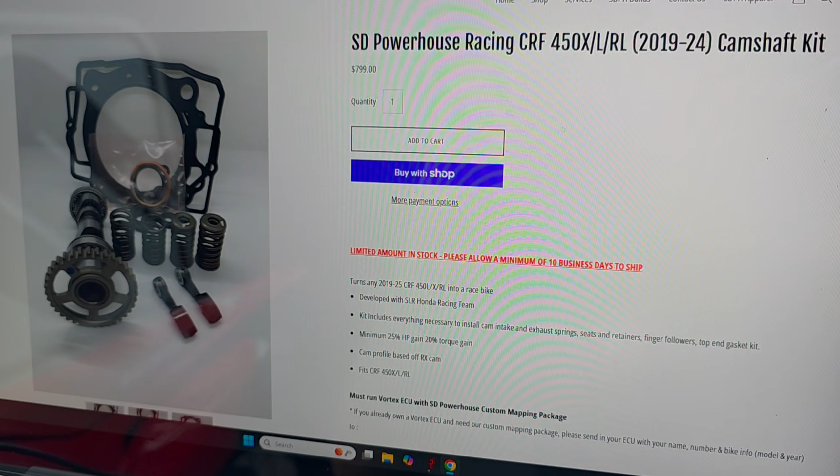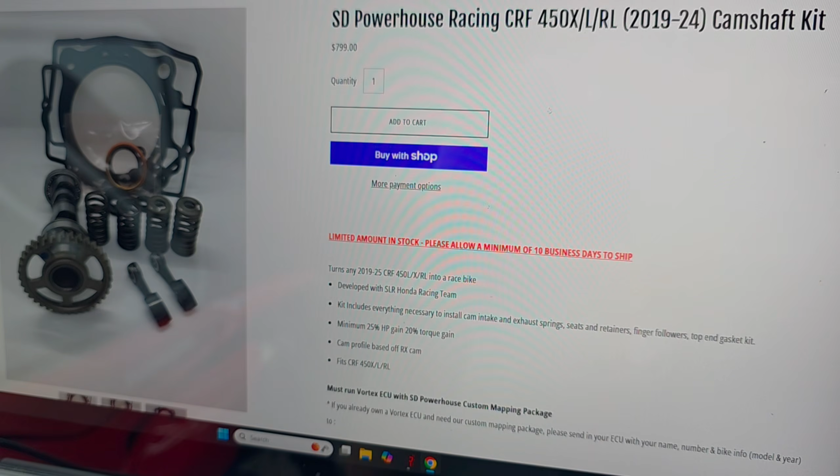The only caveat with their kit is that on their website it specifies you have to run a Vortex ECU with their tuning in place, and that is obviously now not the case. The entire reason we did this was to build mapping for the OEM ECUs for the CRF450Ls and RLs with this kit installed. They also note on their website that you will get at least 25% more horsepower and 20% more torque. We're actually way beyond that when you compare these bikes in 100% bone stock trim to the way it sits behind me now.

So without further ado, let's dive right into this by starting off with where this thing rolled out of the showroom floor in terms of power and torque compared to where it sits now.

Let's start this comparison off here with these three graphs. The green line is this bike in 100% bone stock trim once we're done breaking it in on the dyno. It made 37.75 horsepower and 27.37 pound-feet of torque to the tire on pump gas. With no physical changes made to the bike whatsoever, you get the red lines, just with our custom tuning in place for the still 100% stock bike. Power comes up to about 39.86, just under 40 ponies, and 28.25 pound-feet of torque, again to the tire on just regular pump gas.

Then the blue line is a good example of what these bikes are capable of with some simple bolt-on modifications and our custom ECU mapping to match that specific setup. For this example, the blue lines are the full Yoshimura exhaust, one of the twin air filter kits, or just removing the backfire screen from your stock filter and pulling that airbox lid off. Power is about 44 horses to the tire and 31.1 pound-feet of torque, again still just on standard premium pump gas. So peak output of 44 and 31 for horsepower and torque are the numbers to beat.

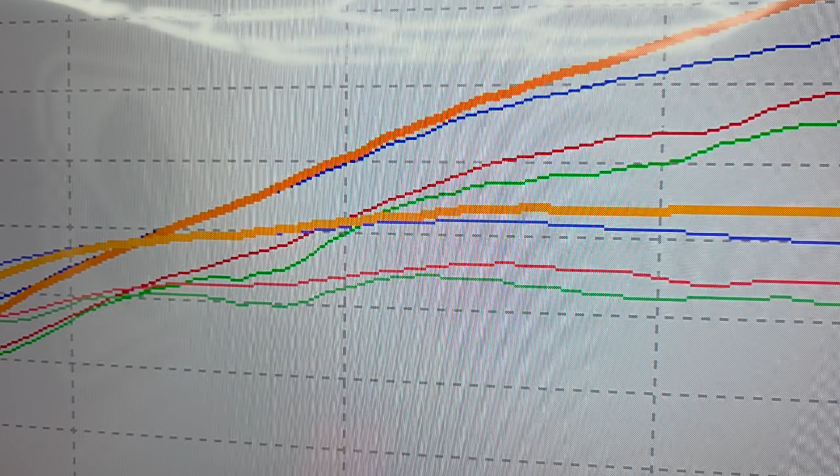And here's what happened when we installed that San Diego Powerhouse cam kit and developed our custom tuning for the new airflow characteristics of that kit with this specific intake and exhaust setup. Peak power is now 49.9 horses, effectively 50 horsepower, and 32.25 pound-feet of torque. The orange lines are exactly as the bike sits behind me right now, and there are enormous gains everywhere after 6,000 RPM compared to the stock cam while still having that Yoshimura exhaust and twin air kit installed. That orange line for both power and torque carries away everywhere above 6,000 RPM.

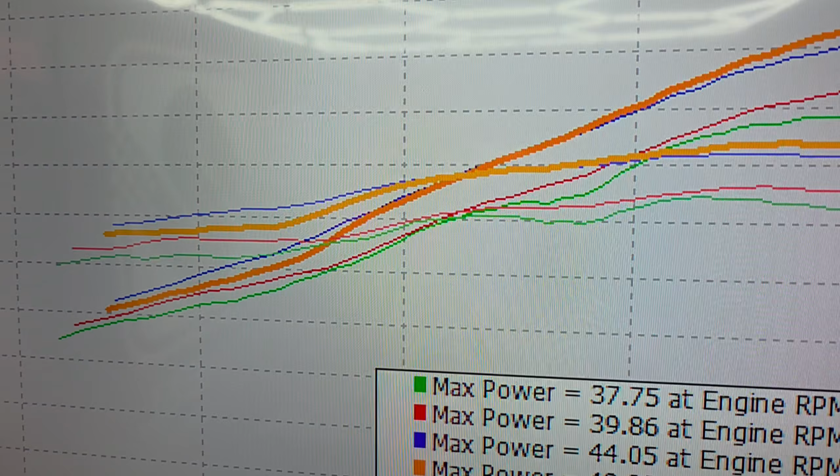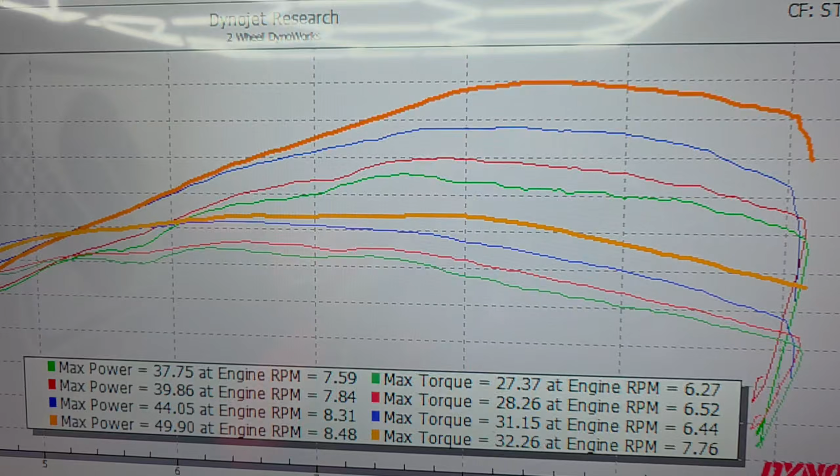Now, with cams, you don't get everything for nothing. You always lose somewhere, and this does actually flow a little bit less air below about 5,000 RPM. You can see that in the power and torque curves, where those orange lines are obviously just lower than the blue ones. But honestly, I could not care less, because the top-end performance improvements are absolutely insane, and the peak number improvements absolutely do not tell the whole story.

I'm actually going to go ahead and clean that graph up just a little bit here and remove a run or so, just to make this a little bit easier to read so I can show you guys exactly what I'm talking about.

So what we've got here right now for comparison is the bike in 100% stock trim - stock intake, stock exhaust, stock tuning, stock everything. That's the green lines. Blue is with just the bolt-on modifications and our tuning for them - the full Yosh, either the twin air kit or just yanking the backfire screen off and yanking the airbox lid off with our tuning.

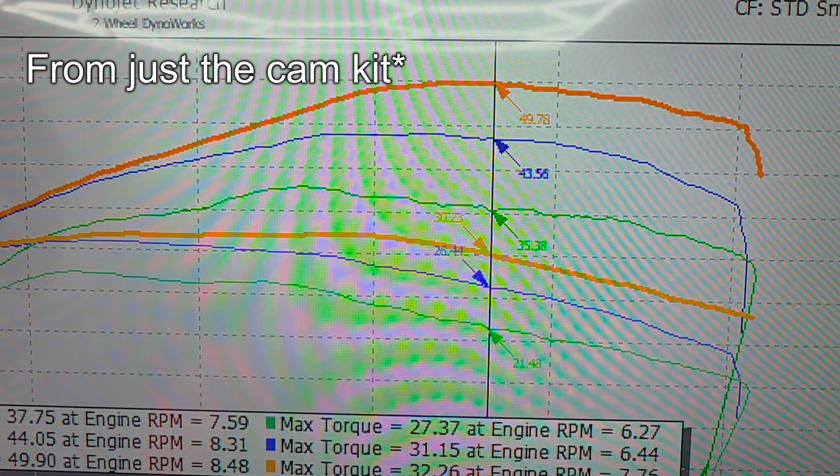And then the orange line is with the cams, with the exact same intake and exhaust and our tuning optimized now for the airflow that this cam kit provides. And as you can see out there at about 8,600 RPM, where the largest gains are present, we've gained about 6 horsepower and about 4 pound-feet of torque, which is a 15% improvement, so a little bit less than they actually claim on their website.

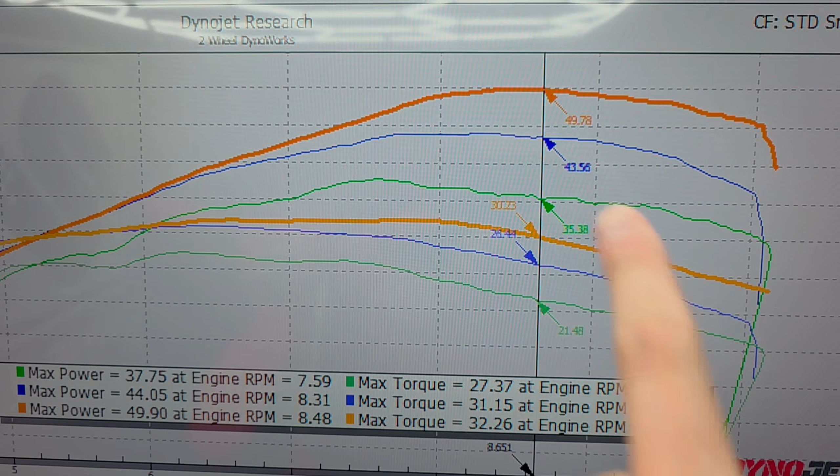However, if we compare the bike as it sits now to how it was when it rolled off the showroom floor, we've gained 14.5 horsepower and about 9 pound-feet of torque, which is over a 40% improvement from stock.

And I can tell you, after having rode this thing around here for quite a while after I just finished the tuning on the dyno to make sure all the part throttle stuff is smoothed out and optimized, and data logged to accurately dial all that in here in the real world - the thing rips. It is dramatically faster than it ever was with any of the prior bolt-on combinations we've shown you previously. Shockingly faster.

And that more aggressive cam actually has kind of the oddly added benefit of even further softening that initial throttle input down low, because it simply flows less air down there. So at low speed and low RPM, it's got even better throttle manners than it ever did previously.

But up top, it's just on a completely different planet now. Like I showed you previously, it does literally just flow less air down there. So that just has the added benefit of feeling even softer than it ever did before.

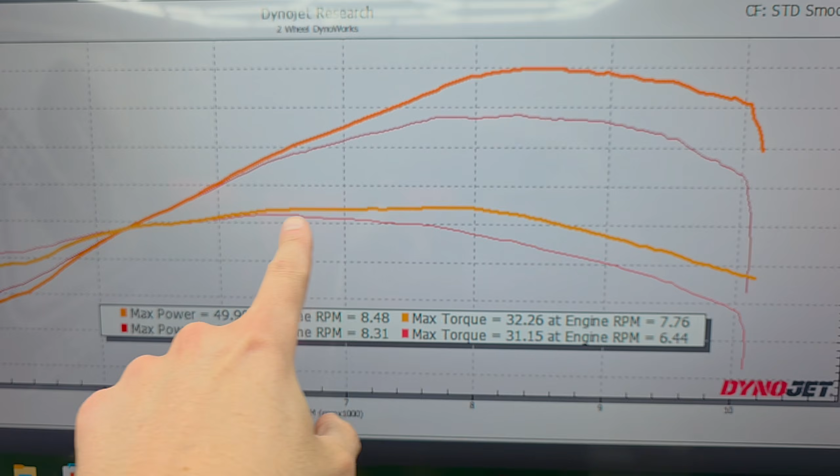And it shows that all things are the same on the dyno here between about 5,000 and 6,000 RPM, but I can tell you from riding the thing, you do feel a slight difference. And then after 6,500, it's just a completely different machine. This massively flatter torque curve makes the thing feel so much more responsive anywhere above 6,000 RPM.

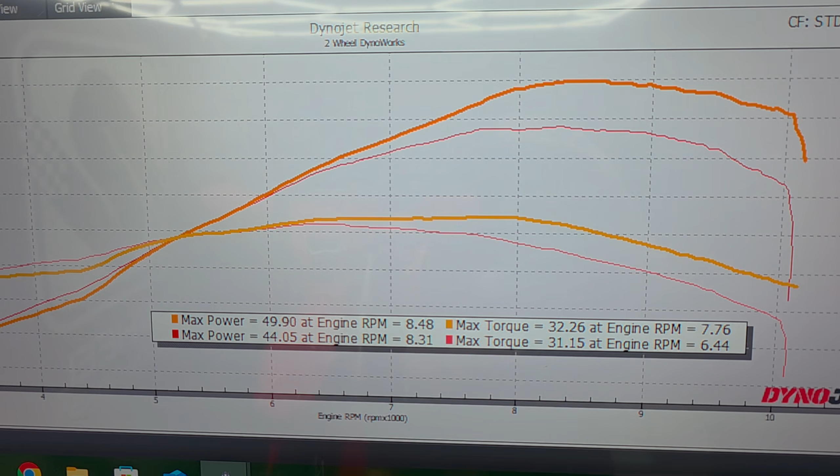I really can't even feel like I'm doing this improvement justice by showing you this dyno graph here or talking about it, because it feels so much more transformative than this graph would really lead you to believe. And this is already insanely impressive looking.

And honestly, this is really the best part - you don't even have to take my word for it. You can do this modification for yourself if you're, I would say, a 5 out of 10 mechanically inclined when it comes to working on a dirt bike. Pulling the head and doing this work is not overly complicated - maybe a 6 out of 10.

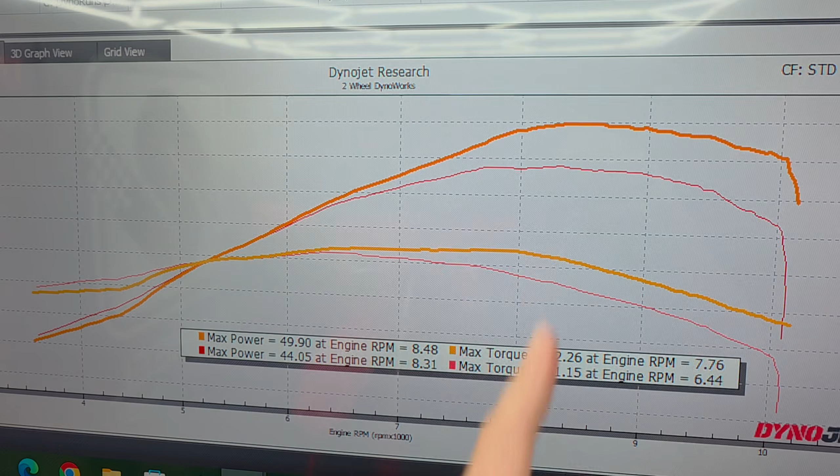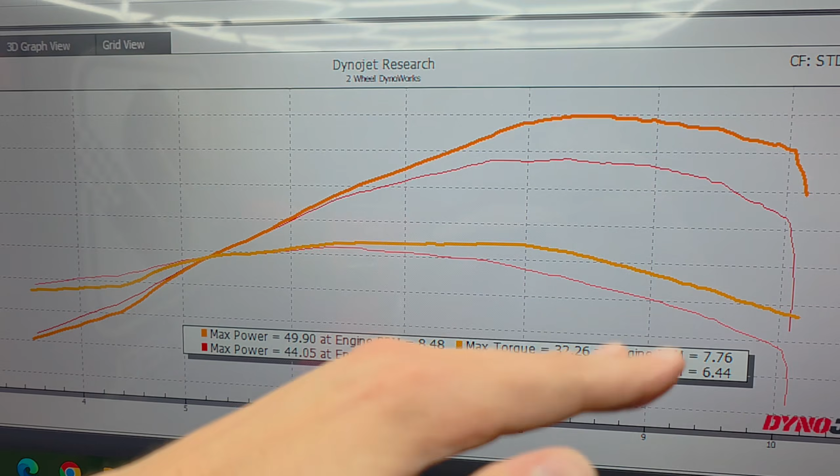But you absolutely do need to have the ECU mapping updated if you've just got bolt-ons like the red lines shown here, versus having that cam kit installed, because obviously you do not get massive airflow improvements and therefore power improvements like that without having the appropriate fuel mapping in place. Again, it's moving less air down there and way more up there.

So the whole fueling table gets real slanted and it absolutely needs to be adjusted. And there's also some really significant ignition timing advance adjustments that really should be made when you do this cam swap, because obviously now the power is being built in completely different portions of the rev range, so the prior timing curves are really not optimized anymore for this new power delivery.

But I'm not going to dive into those specifics too much, because honestly, that stuff's harder to figure out than fuel mapping for most folks, and I'm not interested in educating other tuners out there on the market that offer tuning for these bikes, or may want to offer tuning for this setup in the future with the stock ECU.

Now, the last thing I want to mention here before I wrap up this video is really the cost of doing all of this. Because a lot of times when folks see those enormous improvements, you start talking about internal engine modifications, they usually get spooked by the cost. But if we really step back and take a look at what we've spent here to go ahead and accomplish these enormous improvements, it's really not that much.

You're talking about $1,000 for a decent pipe like the full Yosh I've got here. You're talking about nothing for the airbox mods, because again, you're just pulling the lid off, and you can buy a twin air filter if you want to, or you can just pull the backfire screen off the stock filter. It does the same thing.

And then about $800 for the cam kit. And then you've got our tuning. All in, you're really only talking about a little over $2,000 for absolutely enormous transformative improvements.

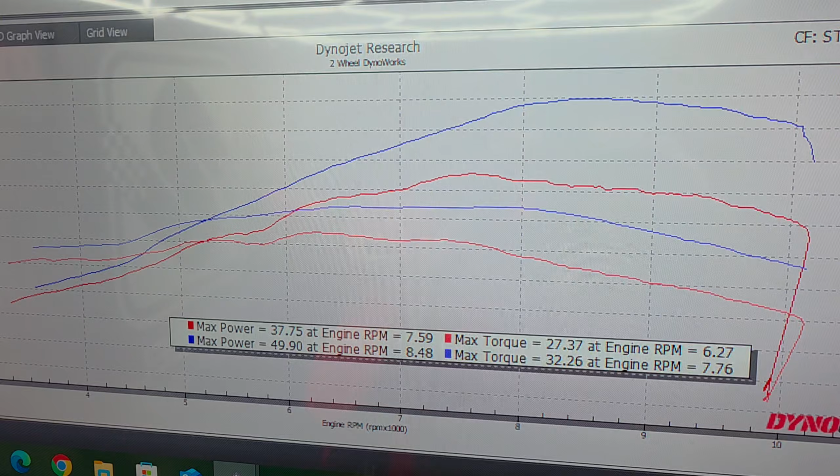In fact, there's really not many other platforms where $2,000 can take you from stock output like this to output like that. And that huge performance for your dollar's value is actually why I've had so much fun developing our tuning for these bikes, because the improvements are enormous and it just really doesn't cost that much, respectively.

Now, that is all I've got for you here today, folks. With this final engine modification, that really actually does wrap up everything we had planned in terms of development for these bikes.

Like I said, I will go through and develop the fuel mapping for the different exhaust systems that you can pair with this cam kit, like the Graves and the FMFs and the X header with different slip-ons and all that stuff.